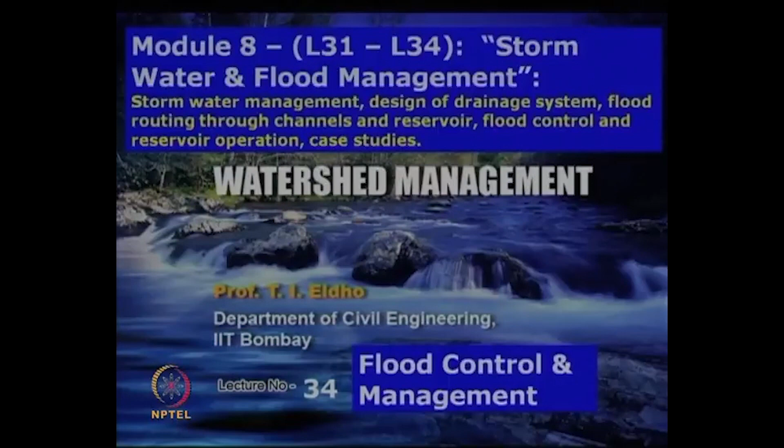We are discussing stormwater and flood management in module number 8. In today's lecture, lecture number 34, we will discuss flood control and management. Some of the important topics covered in today's lecture include floods, causes, flood damages, flood forecasting and warning, flood control, reservoir operation, and flood management. Some of the keywords for today's lecture include flooding, flood control and flood management.

As we were discussing earlier, stormwater and its management is a big issue. When we discuss watershed management, we have to see how the rainfall runoff is taking place within the watershed, how we have to do the flood routing or flow routing, and whether there is any scope for flooding in that area. All those issues we have to look into.

In today's lecture we are going to discuss why this type of flooding can take place on a watershed basis or in a particular area, what are the causes, and what kind of control measures we can adopt in order to reduce this flooding. So, let us look into the flooding problems.

As I mentioned earlier, floods affect a large number of people. Some estimates say that floods affect the lives of more than 65 million people per year globally. That indicates how many problems are due to flooding. More than any other type of disaster, including war, drought, famine, or earthquake, the deaths and other issues related to flooding are much more.

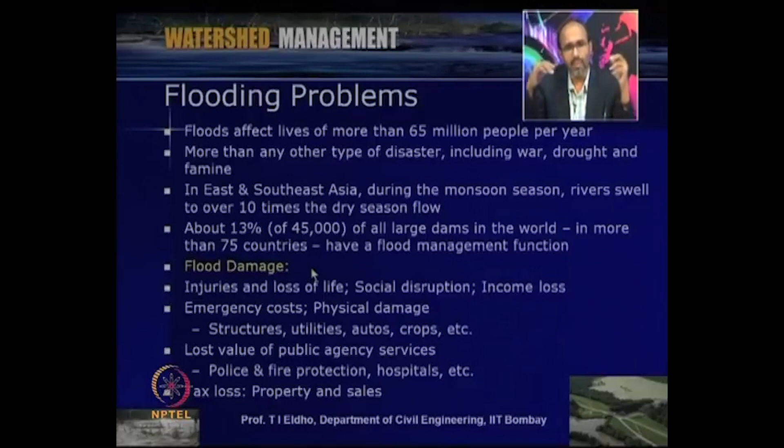Now let us look at flood damages. There are a number of damages related to floods. It can be loss of life, injuries, social disruption, huge economic losses, emergency costs, physical damage, and collapse of buildings, structures, bridges, and roads. Many utilities like telecommunication systems and electric supply will be affected. Then cars and other automobiles will be affected.

Then there is the major impact especially to crops. Due to heavy flooding in many areas, the crops will get spoiled, and there will be related famine and other issues.

Then there are lost values of public agency services. Whenever this kind of flooding takes place, we have to deploy public agencies like police, fire force, hospitals, etc. to cope with the flooding. So that is another big loss due to flooding. And there are also losses like tax losses, property and sales.

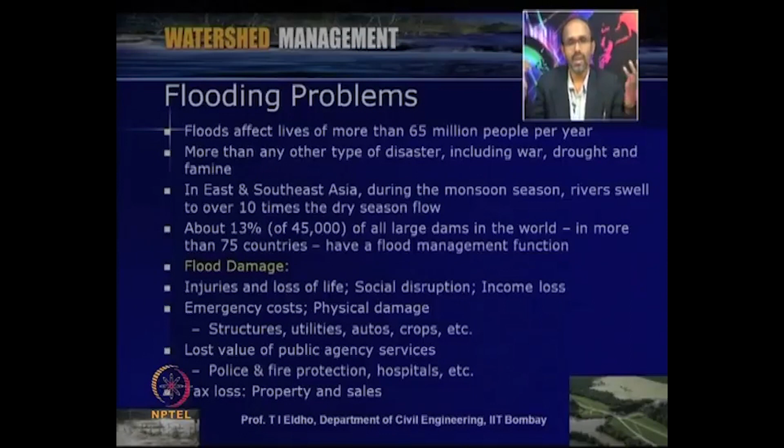So, that way we can see that flooding is a big problem, and in most of the countries flooding takes place, and we have to look into how we can reduce these flooding problems, how we can control these flooding problems. So, that is what we will be discussing today.

So, whenever we discuss floods, most of the time these floods happen due to heavy rainfall. That means in a country like India or South Asia, it will be mainly due to the heavy monsoon which takes place for 3 to 4 months, starting from June to September or October of the year.

So, that is one reason, but of course, many other reasons are also there, like in coastal urban cities, as we discussed earlier, when heavy rainfall takes place and simultaneously tidal effects also take place, then the flooding problem increases. Similarly, especially in hilly regions or wherever snowfall is there, when snow melt takes place, there is also a possibility of flooding.

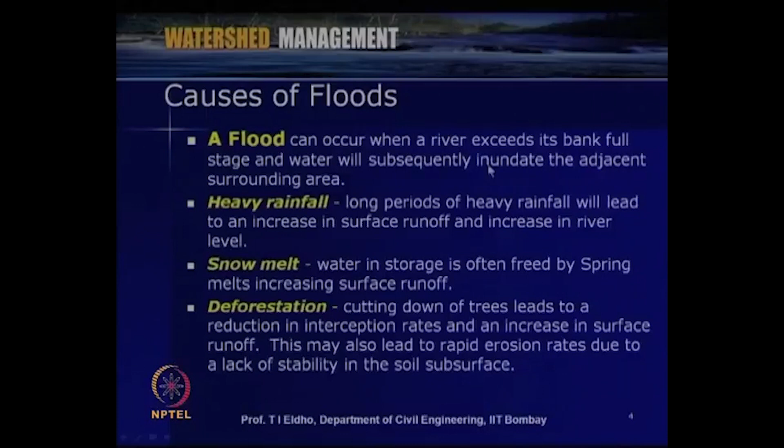So, let us look into the different causes of flooding. As we discussed, flood can occur when a river exceeds its bank full stage, and then water will subsequently inundate the adjacent surrounding area. So, generally in most of the areas the river will be overflowing, and this water will be going to the surrounding areas and inundating them.

So, the floods can be due to heavy rainfall, like long periods of heavy rainfall will lead to an increase in surface runoff and increase in river level. So, that can be one reason, and most of the time this is the main reason as far as flooding is concerned. Then snow melt. Water in storage is often freed by spring melts, increasing surface runoff. So, with snow melt the surface runoff increases, and that can also be a cause of flooding.

And then some of the causes like deforestation. As we were discussing in some of the early lectures, forest stores some portion of the runoff, so that the runoff will be slowly taking place. So, when deforestation takes place on a large scale, the cutting down of trees leads to reduction in interception rates and an increase in surface runoff. This may also lead to rapid erosion rates due to a lack of stability in the soil subsurface.

So, some of the causes can be deforestation, and also in coastal regions tidal effects, and then in some locations, due to any reason, a dam break takes place. So, that can also be a cause of flooding.

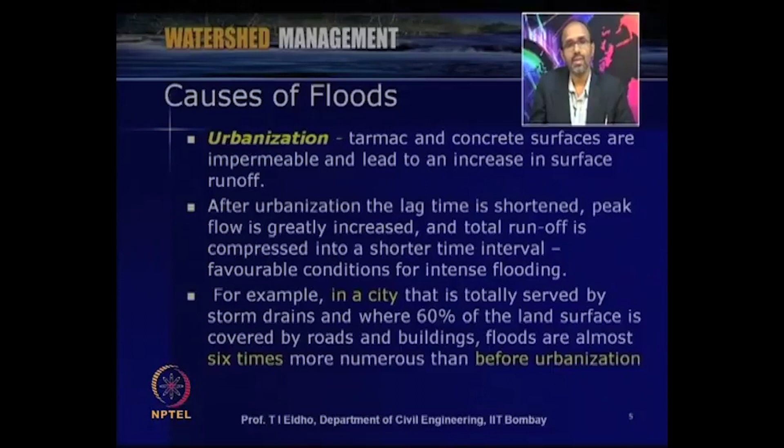So, where the tide also simultaneously rises, and then also sometimes failure of a dam, all those things can be some of the causes as far as flooding is concerned.

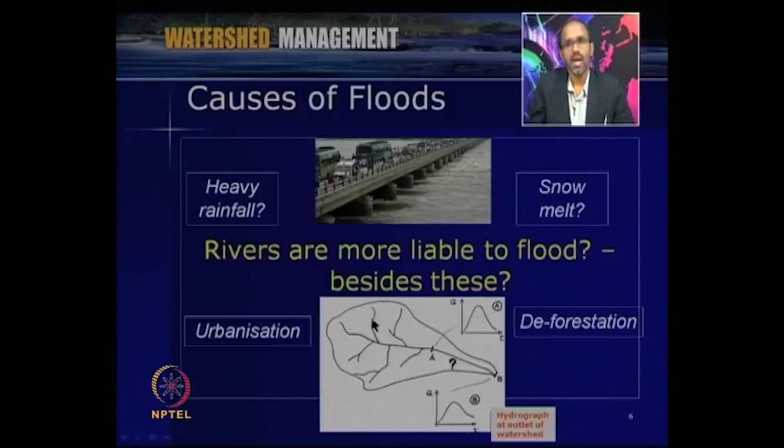So, on a watershed basis, as we discussed, if this is a watershed, then all the flow will keep on coming as runoff from various subcatchments, and then it will be routed through the channel. So when this level rises above the banks, then flooding takes place. So on a watershed basis we can calculate or estimate how much flooding can take place through some of the mathematical models which we discussed earlier.

So, now let us look at what will be the results of this flooding. We have seen that the flood damages are very big. It is not only loss of life, but huge economic loss is also taking place. So, let us look at some of the important points, what are the results of flooding. Due to flooding, a large amount of water will be flowing through the river. So, flooding greatly increases the river's energy, so it can do more work.

So the velocity of flow will be increasing, the depth of flow will be increasing; the deeper and faster flowing river can carry more load, and more sediments will be carried, and maybe also trees and garbage etc. will be carried through the river due to the increase in carrying capacity. So, most rivers turn brown because of the large amount of sediments carried in suspension. During the heavy monsoon or heavy rainfall season, the silt or sediment will be carried through the river. The amount of erosion carried out by hydraulic action and abrasion is greatly increased.

So, due to the increase in velocity and depth, the flow conditions greatly increase, and then the hydraulic actions, the velocity, depth of flow, and then the abrasion, so that the sides of the river may also get eroded. So, that will also be taking place. These are some of the important effects or results of flooding.

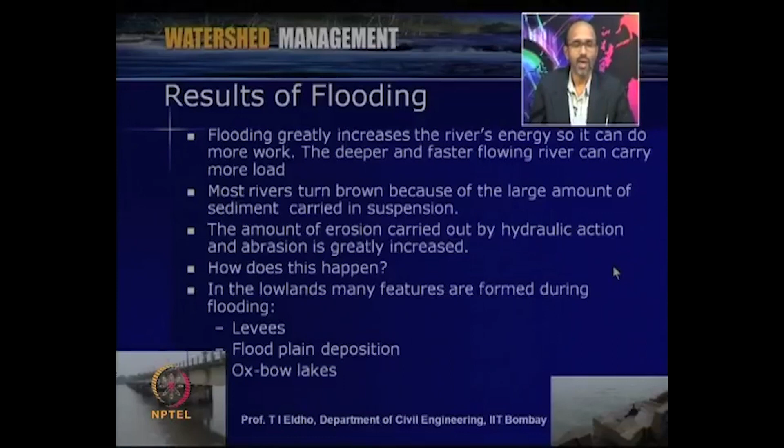And then in the lowlands or the downstream side, many features are formed during flooding; large deposition can take place, like oxbow lakes, and if levees are there, they will be affected, or a large amount of deposition takes place, especially in delta regions or lowland regions. So, these are some of the important results of flooding which we generally see, especially during the monsoon season.

So, now when we look into the damages caused by this flooding, we can classify the damages into short term damages and long term damages. Short term means immediately when flooding takes place, within the immediate time period, what are the losses or damages, and long term means what is the economic repercussion or the infrastructure repercussion due to the flooding. So, flood damages we can classify into short term damages and long term damages.

So, short term damages, as we discussed, can be loss of life, destruction of property, crop damages, loss of communication networks, freshwater pollution, loss of electric power. All those are some of the short term effects or damages due to flooding. These are immediately visible damages, and these kinds of damages critically affect the area, and large migration can take place due to these short term effects.

And long term effects or long term damages include replacing what is lost or damaged. So, due to heavy flooding, so much infrastructure will be affected, so much area will be eroded, crops will be affected, and the electric power network or the communication network will be affected.

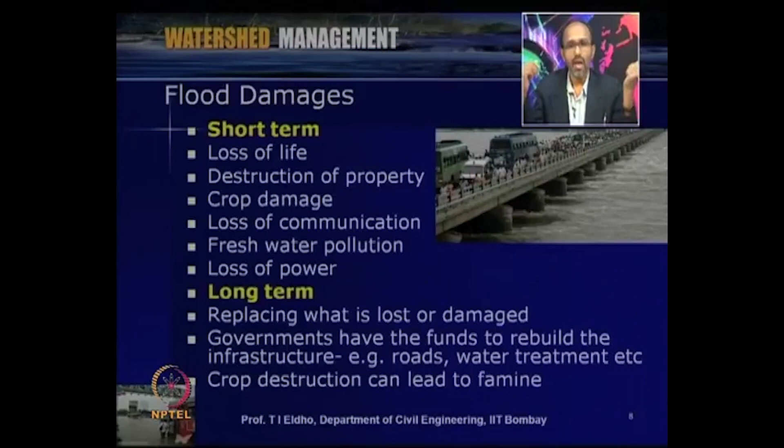Then also due to heavy flooding, many of the agricultural lands will be affected, and crop destruction takes place. So, once a crop is lost, you can see that food shortage will take place, and that can lead to famine. So, that way flood damages can be short term or long term.

So, when we discuss watershed management, we have to see how we can control this flooding, what kind of measures can be adopted, so that the flooding effect will be reduced. And then with respect to weather prediction, and modeling like flood routing or rainfall runoff modeling, whether we can forecast, for the given rainfall condition or non rainfall condition, how much flooding is possible. So, flood forecasting is one of the important things which we can look into.

So, once we can forecast, then we can also think about flood warning, so that the people can be cautioned that this area will be flooded. So, you have to take appropriate measures to take away your valuable things, and then vacate the people from the possible flood affected area. So, that way flood forecasting is very important.

So, flood forecasting generally is the use of real time precipitation and stream flow data in rainfall runoff and stream flow routing models. We were discussing in the last few lectures rainfall runoff modeling and stream flow routing. These kinds of models we can directly utilize for flood forecasting. So, forecasting is to identify the flow rates and water levels for periods ranging from a few hours to days ahead, depending upon the size of the watershed or the river basin.

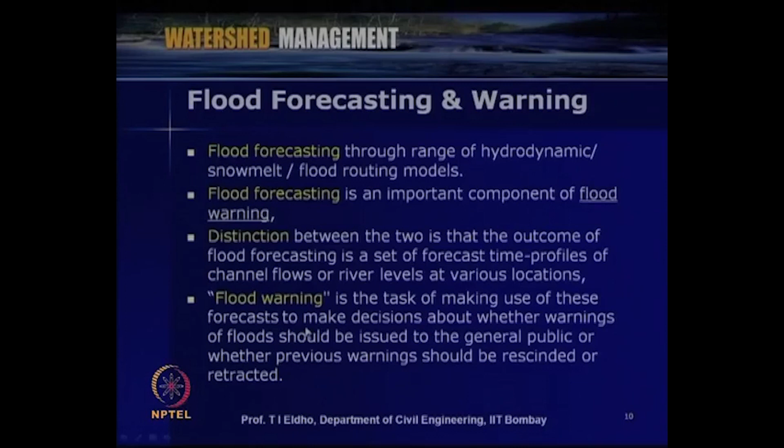So, flood warning is the task of making use of this forecast to make decisions about whether warnings of floods should be issued to the general public, or whether previous warnings should be rescinded or retracted. So, depending upon the rainfall condition, river level conditions, or channel level conditions, we can decide whether to give a warning, and if warnings are already given, whether that should continue. If it is not going to continue, we can retract back or rescind, indicating the possibility of flood is not there, so people can start their normal way of life.

So, flood forecasting and flood warning are very important aspects of flood management, either on a watershed basis or on a river basin scale. Within this perspective we are discussing flooding, the damages due to flooding, the causes of flooding, and flood forecasting and warning.

Now let us look at what kind of control measures we can adopt so that the effect of floods can be reduced. Generally, flood control measures can be of two varieties: one is structural type flood control measures, and the second is non-structural type flood control measures.

When we look into structural measures, what we are doing is, if we identify some areas where flooding problems exist, we construct certain structures or various measures so that flooding will not take place or the flooding effect will be reduced in that area. There can be a number of structural measures which we can adopt depending upon the location, area, river flow condition, and geographical conditions.

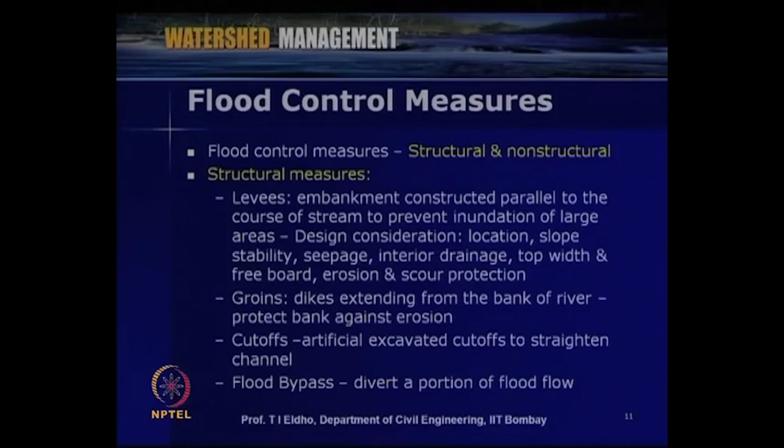We can also have structures like flood bypass. This means wherever there is a possibility of heavy flood in some regions, we can take the flow through certain other means like tunnels, pipes, or other channels, and divert the flood flow. So flood bypass means diverting a portion of the flood flow so the area will be saved, especially in city regions where chronic flood problems exist, then we can construct flood bypasses.

Some of the other structural measures include channelization. This means activities like clearing the channel, straightening it, widening it, deepening it, and also lining the sides. Combined, this process is called channelization, which will increase the flood carrying capacity of the river or channel, so the flooding problem will be reduced.

If any bridges, especially between the bridge piers, don't allow sufficient flow to pass, we can modify those bridges by giving appropriate height or appropriate ducts so that normal flow will take place. So bridge modification is another structural measure, like removal, replacement, or widening and raising, as far as bridges are concerned.

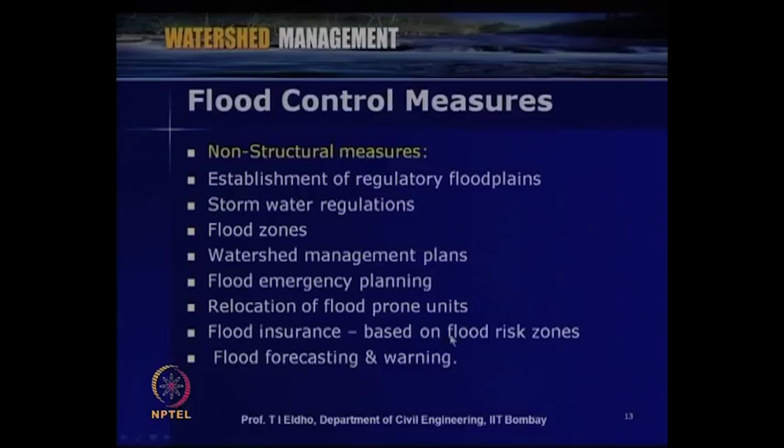These non-structural measures can include many things. Some of the important ones are listed here. We can establish regulatory flood plains.

Depending upon the river flow, we can study the historical flooding problems, the flood levels, or the depth of flow taking place in particular locations, especially in city regions. Then we can have rules and regulations so that no construction will take place in the flood plains, so that property and human life can be saved. That way we can establish regulatory flood plains, and then stormwater regulations.

For stormwater, as we discussed, whether we can store some of the water, or go for water harvesting, or through afforestation - all those measures which we discussed earlier can reduce the intensity of the stormwater movement, and that kind of regulations we can have. So stormwater regulations are another non-structural flood control measure.

We can also have flooding zones or flood zones. For the given river, according to the given conditions, after studying the rainfall to runoff or the flooding problems for a large number of years - 10 years, 50 years, or 100 years - we can generate a flood zone map, so that we can restrict development in those flood zone areas. Flood zone mapping is one of the generally used techniques as far as non-structural measures are concerned.

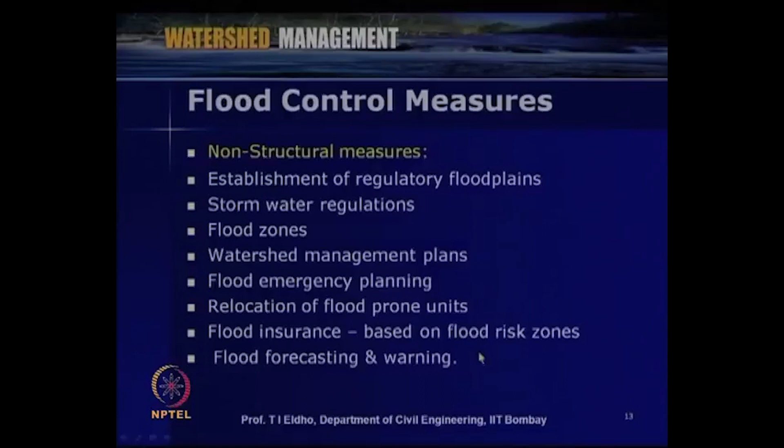And another important non-structural measure is appropriate flood forecasting and warning, so that the public can take appropriate measures to protect themselves and their properties. So, as far as flood control measures are concerned, it can be either structural measures or non-structural measures.

Now let us look at some of the important aspects which we can do to manage the flood, or flood control management. These actually reduce the intensity of flooding, and ultimately may keep away the possibility of flooding. Some of the important things that can be done are listed here, like afforestation - we can plant trees that may increase the interception rates, and that may reduce the surface runoff. So this can be one managerial measure.

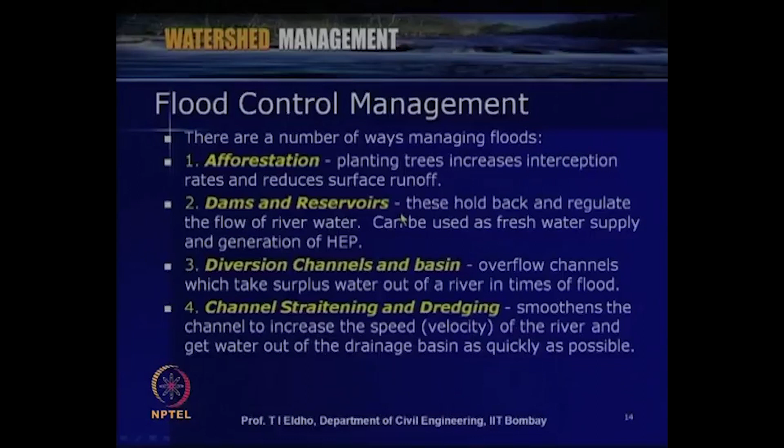Then the second one is dams and reservoirs. Depending upon the area, as I mentioned earlier, about 13% of the world's largest dams are constructed only for flood protection or flood control management. Dams and reservoirs hold back and regulate the flow of river water, and this can be used as a fresh water supply and also for generation of hydroelectric power.

Then diversion channels and basins. Wherever flood prone areas are there, we can divert some of the flood water through extra channels, pipes, or tunnels - overflow channels which take surplus water out of a river in times of flooding.

Then channel straightening and dredging, as we already mentioned. This may smoothen the channels to increase the speed or velocity of the river, and get water out of the drainage basin as quickly as possible, so that the intensity of flood will be reduced, or the flow depth or flood depth will be reduced.

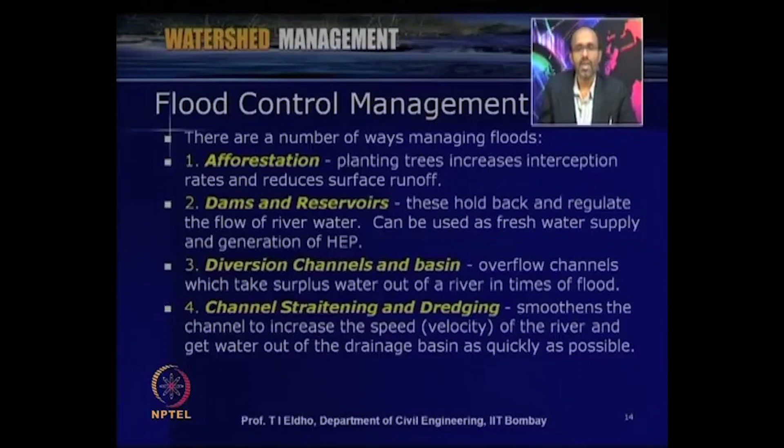Then some of the other measures - it can be structural measures for flood control management, like artificial levees.

So we can construct levees on river banks, so that more water will be held in the river. And then we can have culverts, semicircular smooth channels, which increase velocity and get water away from the urban areas as quickly as possible. Then revetment, channel walls or gabions. So these are some of the measures which we can adopt.

So, like, strengthen the river banks against erosion using large lumps of stones. Then we can have gabions or walls. Then restricted use of floodplains. As we discussed, this is a non-structural measure. So we can have legislation so that there will not be any construction in the restricted floodplain areas. Then higher selective insurance premiums or refusal to insure particular locations. So all these can be used.

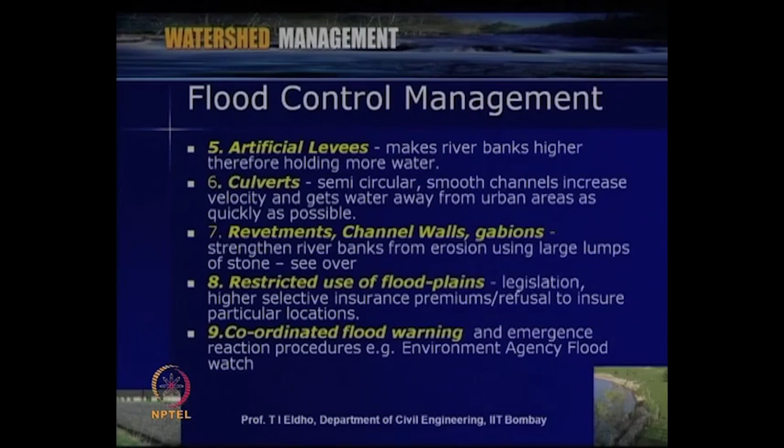And then finally, a coordinated flood warning system. This is one of the important things which can be done in flood control management. So we can have coordinated flood forecasting, flood warning, and emergency reaction procedures, so that specified agencies, for example the Environment Agency in the United Kingdom, the Environmental Protection Agency in the USA, or the National Disaster Management Authority in India,

these kinds of agencies can coordinate the flood forecasting and flood warning, so that the people can be warned that there is a possibility of flooding, and then appropriate measures can be taken. So that way flood control management is very important.

Dams and reservoirs have helped immensely in attaining self-sufficiency in food grain production besides flood control and drought mitigation. That we have seen earlier. So the reservoir stores a large amount of water, and that will reduce the intensity of flooding or the flow condition that takes place within a river. So flow depth in rivers depends on reservoir releases or reservoir storages.

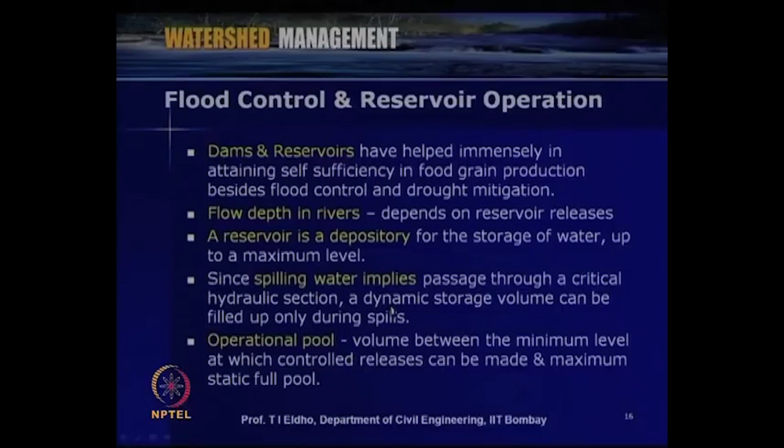Now, the operational pool is conceptually divided into conservation and flood control pools. We were discussing this operational pool in the last slide. Conservation means how much water should be conserved for future purposes, and the flood control pool is about how much we have to store to effectively reduce the flood. So maximum possible empty space is desirable for flood control, especially in the monsoon season. We have to keep the maximum possible empty space.

Meanwhile, water storage is required for the remaining objectives like water supply, irrigation, and hydropower, especially if the reservoir is multipurpose rather than only for flood control. So we have to see that sufficient water is available for future water supply, irrigation, hydropower generation, etc. Since flood risk differs according to the season, the flood control pool typically varies according to the time of the year. As I mentioned, during the monsoon season, the heavy rainfall season, we have more flooding problems.

So, that way we should have the operational pool which is for the flood control. So, that way we have to control. So, the reservoirs can be a single reservoir, where we can have direct control, only one reservoir, how much is to be released or how much is to be stored, so that flooding will be reduced. So, like that we can easily take decisions.

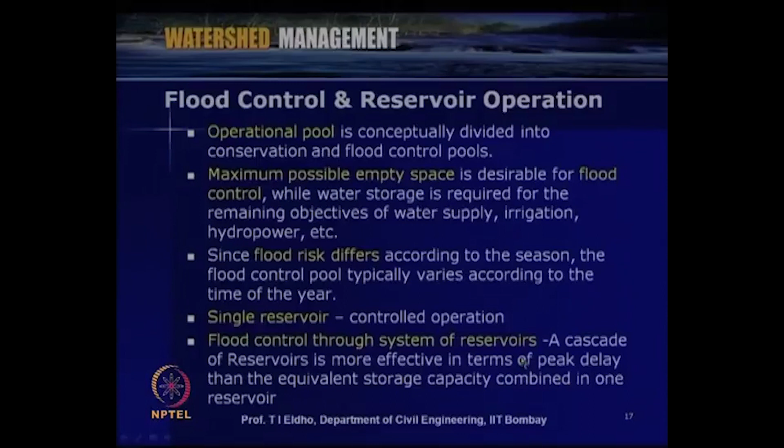But wherever possible, if there are multiple reservoirs or a system of reservoirs, this will always be advantageous as far as flood control is concerned, since whatever extra flood is coming will be stored in a cascade of reservoirs. So, a cascade of reservoirs is more effective in terms of peak delay than the equivalent storage capacity combined in one reservoir. So, if multiple reservoirs are there, we can effectively operate them in such a way that good storage can be given, and release will be appropriately done from each reservoir, so that flood will be controlled and appropriate storage will be given to each reservoir.

So, now when we look into some of the reservoirs which are only constructed for flood management, which are called flood reservoirs, how to manage this? The flood control management approach we can specifically develop for that particular reservoir, considering the flood pool as a restriction for the optimization or simulation of the conservation pool. So, we may have to go for simulation to identify, with respect to rainfall runoff, how much flow is taking place to the reservoir, and then how much storage should be allowed.

And then operation under flood conditions can be performed through previously set rule curves or within a real time framework. So, we can have real time reservoir management for flood control, or we can also develop a rule curve depending upon past experiences, past data. We can generate a rule curve, and using this rule curve we can operate the reservoir for flood management. But of course, it is always better to go for real time management, so that with rainfall variation or weather conditions, we can have real time flood control.

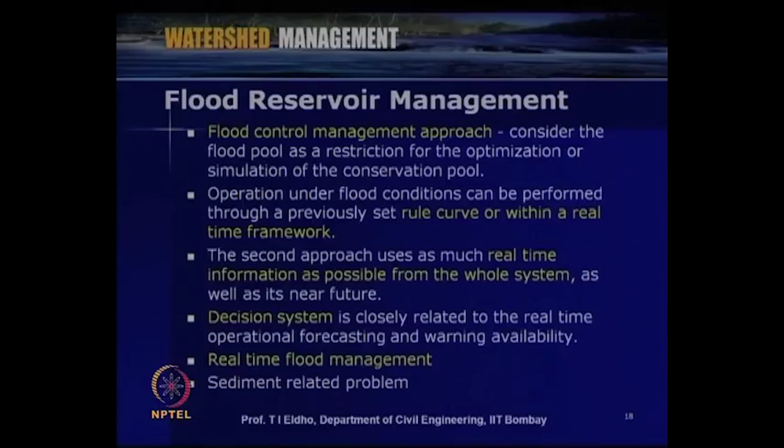So in these cases, to reduce the silting problem in the reservoirs, we also have to deal with the sediment related problems. So that will also be considered as far as flood reservoir management, so that the capacity of the reservoir will be maintained.

So as we discussed, the flooding situation depends upon many parameters like meteorological parameters, geographical parameters, or conditions like an earthquake or a dam break. So many parameters will be there, and we cannot control all these parameters. So complete control of the flood is not possible. The only thing is that we can modify the problem, or we can reduce the effect with respect to space and time.

So generally, in countries like America, the US Army Corps of Engineers takes as its mission to assist with and provide leadership in managing the flood risk. So depending upon the agencies working in that particular country, whether it is the army or a disaster management cell, whichever the agency, they can take the leadership for the control of flood or to reduce the flood problem.

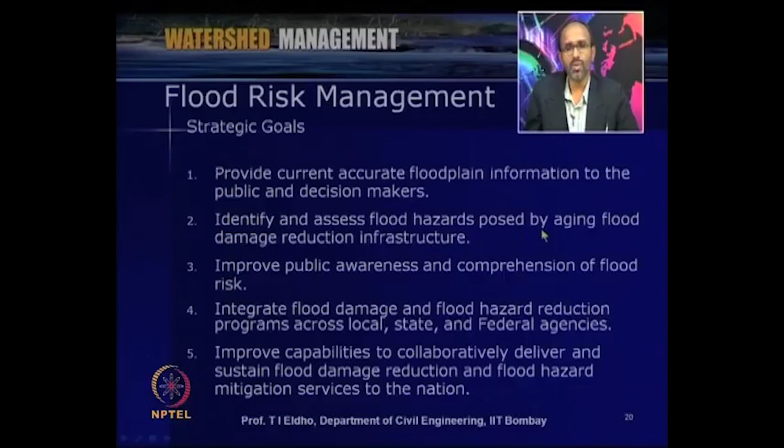So some of the important strategic goals when we discuss flood risk management are listed here. The first one is provide current, accurate floodplain information to the public and decision makers. So this is very important. Accordingly the decision makers can take decisions and the public can react. Then the second strategic goal is identify and assess flood hazards posed by aging flood damage reduction infrastructure. So this we can assess and then take appropriate measures.

Then the third one is improve public awareness and comprehension of flood risk. So this public information or public awareness is very important, so that the people can react if sufficient time is given, and then they can take appropriate measures by themselves, and the government can give appropriate support. So that way we can improve the public awareness.

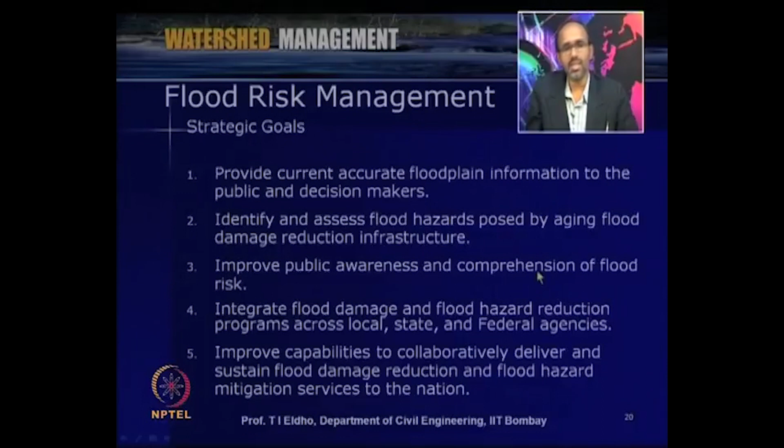Then integrate flood damage and flood hazard reduction programs across local government, state government or federal agencies. So we can come up with integrated flood damage and flood hazard reduction. Then improve capabilities to collaboratively deliver and sustain flood damage reduction and flood hazard mitigation services to the nation. So these are some of the important strategic goals which we can adopt as far as flood risk management is concerned.

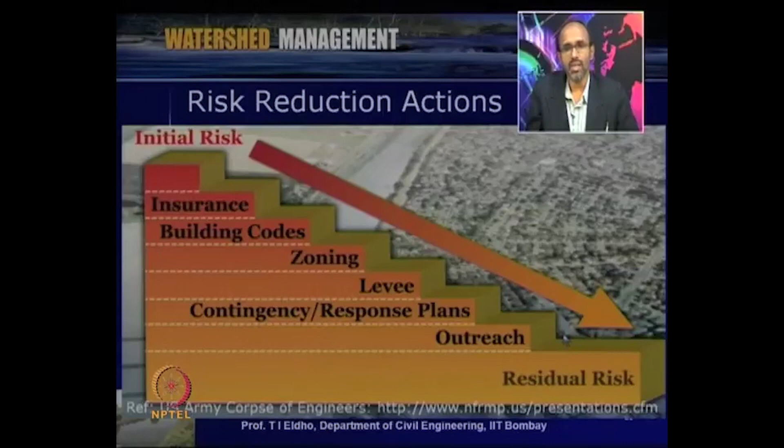So then, what are the uncertainties associated with the flooding problems as far as flood risk management is concerned? In flood damage reduction planning, uncertainties include future hydrologic events, whether the rainfall is going to continue or when the next high intense event can take place, then stream flow and rainfall, then choice of distribution and values of parameters, then simplified models of complex hydraulic phenomena like geometric data, the misalignment of structures, material variability, and slope and roughness factors, etc.

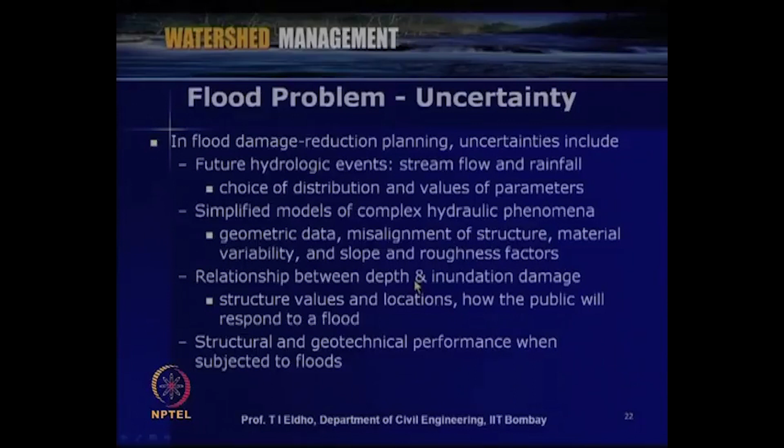Then the relationship between depth and inundation damage. So we can identify this depth and inundation damage relationship through structural values and locations and how the public will respond to a flood. Then structural and geotechnical performance when subjected to floods. So what are the structural related issues for the various structures like bridges, buildings, etc., and then what are the foundation related problems.

So now when we discuss the flood problem, we have to look into what restoration measures we can adopt. This we can have in about 5 steps. The first one is we have to prepare appropriate plans, in anticipation; flood measures plans we have to develop before the event threatens. Then we can go for detection, through flood forecasting and warning. So through detection and ongoing information we can gather and provide warning to monitor prevention and mitigation systems.

And the third one, what kind of preparation we can do, so that once a flood warning is put, we can communicate with the people and take appropriate evacuation measures. Then, once the flooding takes place, what will be the first response. So, actually what is happening, first response.

So, that is, once the event has occurred, how we can minimize the negative consequences, and then what kind of action can be taken to save lives, then how we can provide food, shelters and clothing to the survivors,

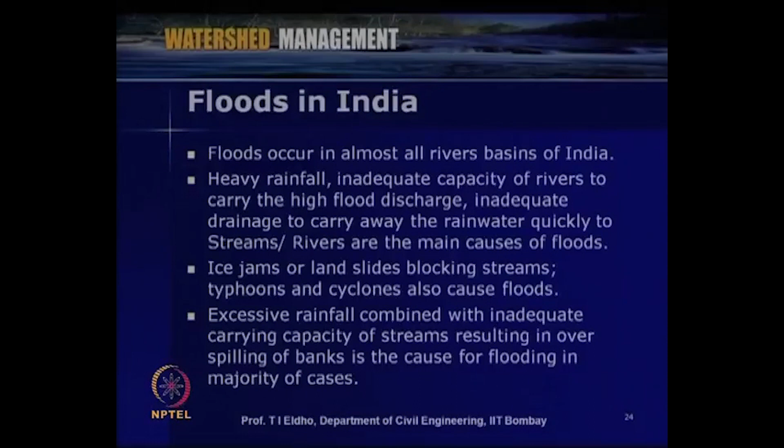So now, before closing for today, let us look at some of the important aspects: what are the flooding problems in India, and what kind of measures are taken to reduce this flooding. As I mentioned earlier, in India flooding occurs in almost all rivers. The reasons are some of the common ones which we discussed earlier, like heavy rainfall, inadequate capacity of rivers, inadequate drainage network, and sometimes climate change effects. So these all cause floods in India.

Then in northern India, especially in the Himalayan regions, ice jams or landslides blocking the streams, and in eastern regions typhoons and cyclones, all cause floods. Excessive rainfall combined with inadequate carrying capacity of streams, resulting in overspilling of banks, is the main cause of flooding in a majority of the cases in India.

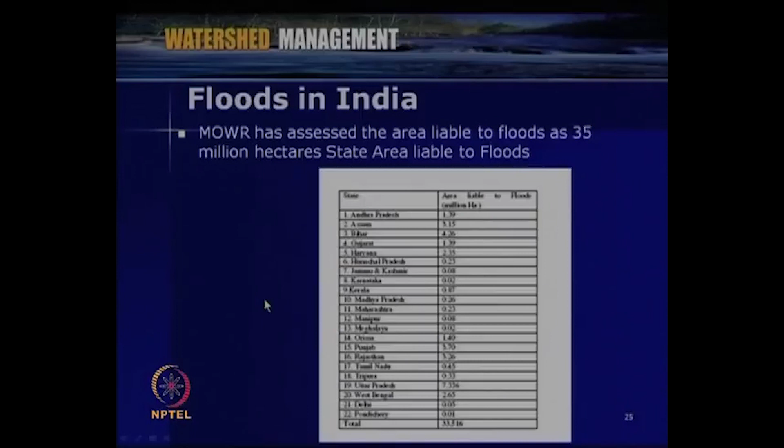If we look into an assessment by the Ministry of Water Resources, we can see that about 35 million hectares of land is liable to floods. So this is more than 10% of the land. On the Ministry of Water Resources website, it is given state-wise how much area is liable to floods. For example, Andhra Pradesh 1.39 million hectares. Like that, the state-wise distribution of areas liable to floods is given.

In India, systematic planning for flood management commenced with the launching of national programs in 1954. So over the last 50-60 years, the Government of India and many state governments have been taking many measures to reduce flood hazards. During the last 58 years, different methods of flood protection, structural as well as non-structural, have been implemented in different states.

Structural measures like storage reservoirs, flood embankments, drainage channels, anti-erosion works, channel improvement works, detention basins, etc. were undertaken on a large scale wherever flood prone areas are there. And non-structural measures like flood forecasting, flood plain zoning, flood proofing and disaster preparedness were implemented, and a large number of agencies were established in the last 2-3 decades.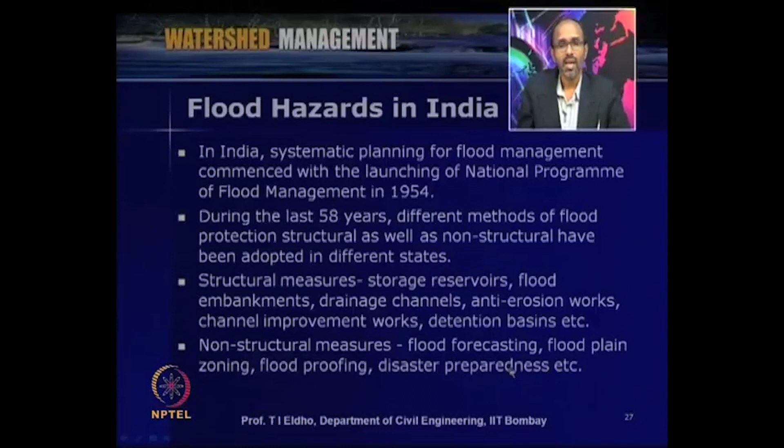So now we have an appropriate flood forecasting and warning system based upon the forecasts by the Indian Meteorological Department and the satellite data provided by the Indian Space Research Organisation. So like that, a number of non-structural measures are also undertaken.

As per the Ministry of Water Resources website, the various flood management measures undertaken in the last few decades include about 35,000 kilometers of flood embankments constructed, then drainage channels of 51,317 kilometers, then about 2,400 town protection works. Villages were raised so that they will be protected from floods; that is about 4,700.

Then reservoirs are constructed with exclusive flood control storage, as we discussed earlier. Some of the reservoirs like Maithon, Panchet and Konar in the Damodar valley, then Chandil Dam on the Subarnarekha, then Rengali Dam on the Brahmani river. These are mainly constructed for flood control.

Then in the last 6 decades, a large number of dams were constructed, so that a live storage of 177 billion cubic meters has been created so far in the various reservoirs for irrigation, hydropower generation, drinking water, etc. These also help indirectly in reducing the flood intensity by storing part of the flood waters. So these are some of the measures taken by the Government of India and various state governments.

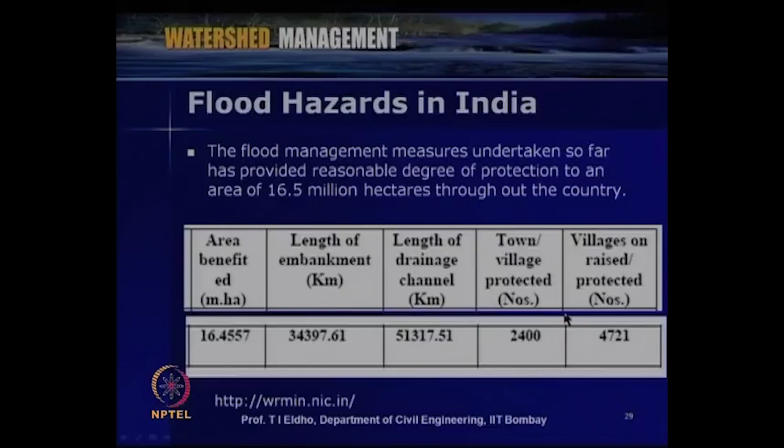So area benefited is listed here, then length of embankment is about 34,397 kilometers, then length of drainage channel, then towns and villages protected, as we discussed earlier. So these are some of the effects of this flood and protection measures adopted by the Government of India and other

state governments. Then we also have an effective flood forecasting system. This has been recognized as one of the most important aspects, reliable and cost effective. Recognizing the crucial role it can play, the Central Water Commission, Ministry of Water Resources has set up a network of forecasting stations throughout the country covering all important flood prone areas.

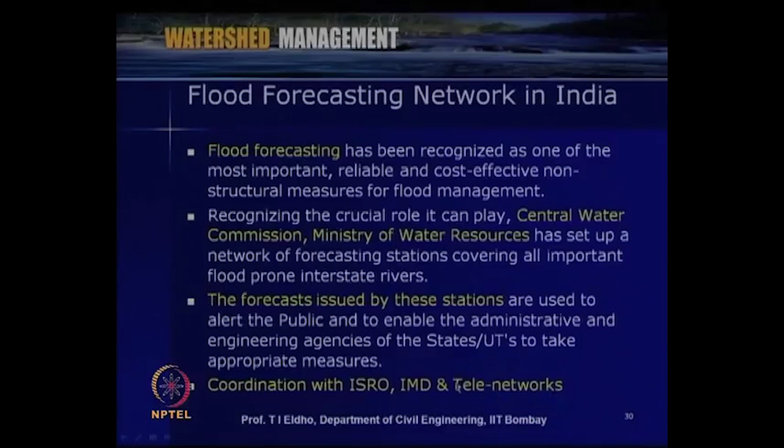The forecasts issued by these stations are used to alert the public and enable the administration and other agencies, so that appropriate measures can be taken. These are all done in coordination with the Indian Space Research Organization, the Indian Meteorological Department and various telecommunication networks, so that appropriate warnings will be given.

As far as the national response mechanism for floods is concerned, first of all, the apex body is the Union Cabinet, and under the Union Cabinet the National Crisis Management Committee, like a National Disaster Management Committee, related to floods, and then the Agriculture Ministry, Ministry of Water Resources, Ministry of Environment, and their secretaries, all come together in this apex body.

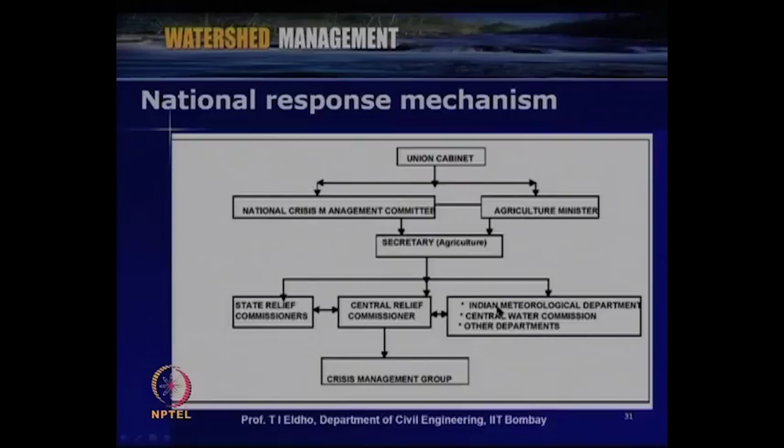Then various state relief commissioners are there, who report to the central relief commissioner, and then agencies like the Indian Meteorological Department, Central Water Commission and other departments all come together. So we have a crisis management group and a National Disaster Management Authority. This authority looks after what kind of mechanism or response should be done for the given flooding problem.

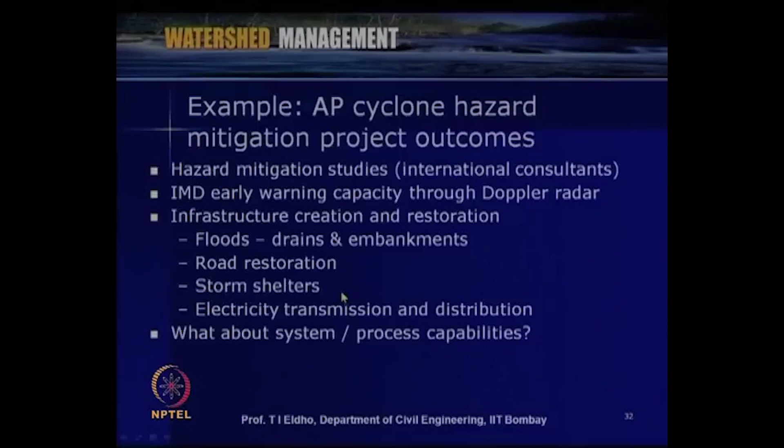For example, the Andhra Pradesh cyclone hazard mitigation project has been undertaken in the last few years: hazard mitigation studies were done, Indian Meteorological Department early warning capacity through Doppler radar was implemented, infrastructure creation and restoration, flood drains and embankment studies were done, appropriate measures were taken, then road restoration, storm shelters. So through appropriate studies this can be done.

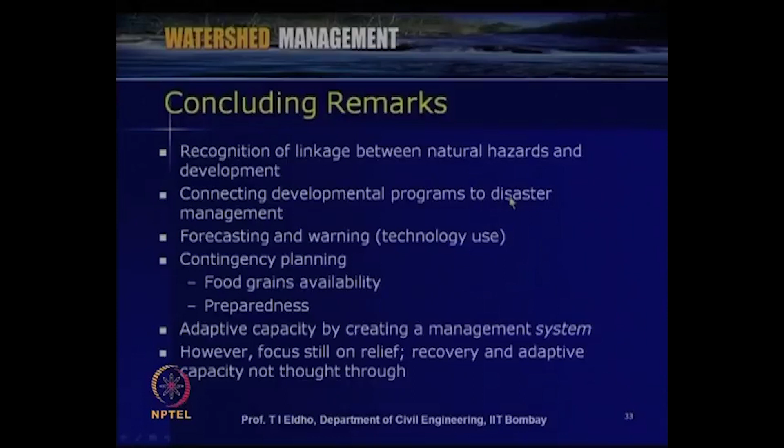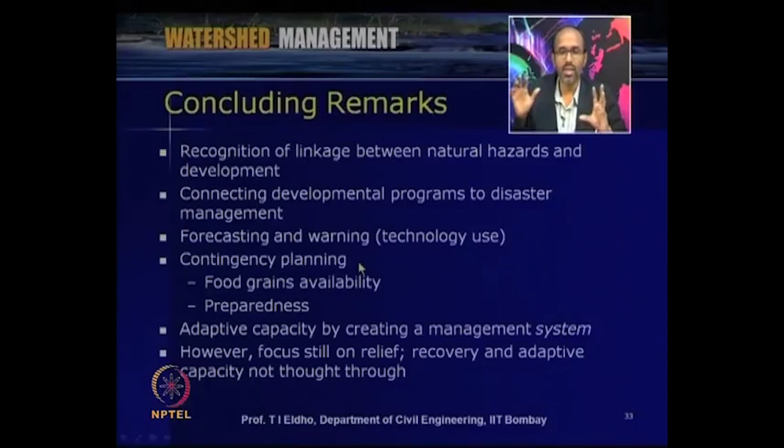So finally, to conclude, flooding is a major problem. We have to recognize the linkage between a natural hazard like flood and development or urbanization effects, and connecting development programs to disaster management is very essential. Appropriate forecasting and warning systems are very essential. Then we have to go for contingency planning like food grain availability, preparedness, adaptive capacity by creating management systems. So appropriate authorities and systems should be made, so that flood management is possible in an appropriate way.

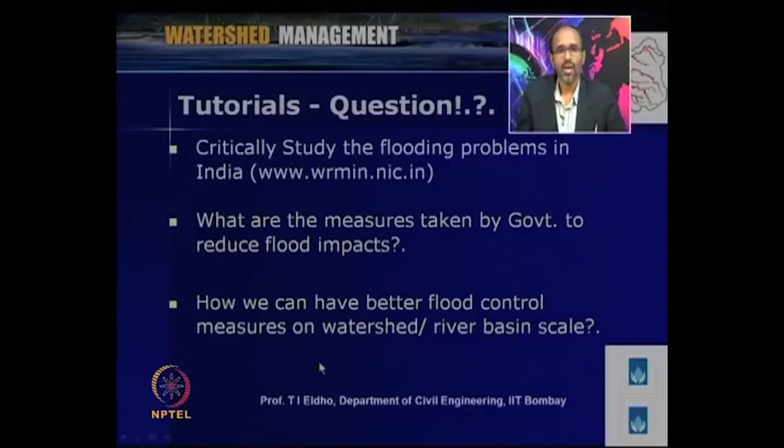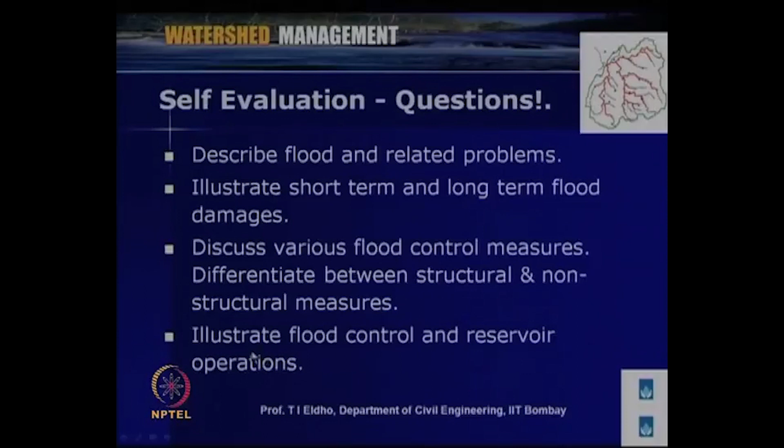A few self-evaluation questions: Describe flood and related problems. Illustrate short-term and long-term flood damages. Discuss various flood control measures. Differentiate between structural and non-structural measures. Illustrate flood control and reservoir operations.

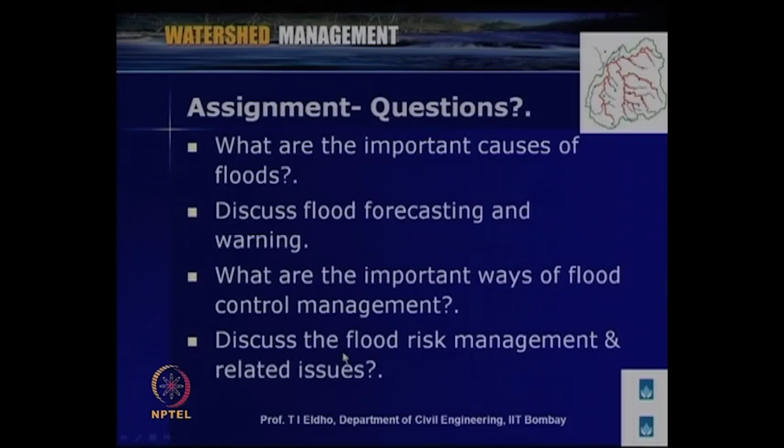A few assignment questions: What are the important causes of floods? Discuss flood forecasting and warning. What are the important ways of flood control management? Discuss flood risk management and related issues. These are some of the important questions related to today's lecture. By going through this lecture, you can easily answer these questions.

So what we have been discussing is flood control and its management, under stormwater management, module number 8. With this, the module is over. Next we will be looking into drought management issues related to watershed management in the next module.